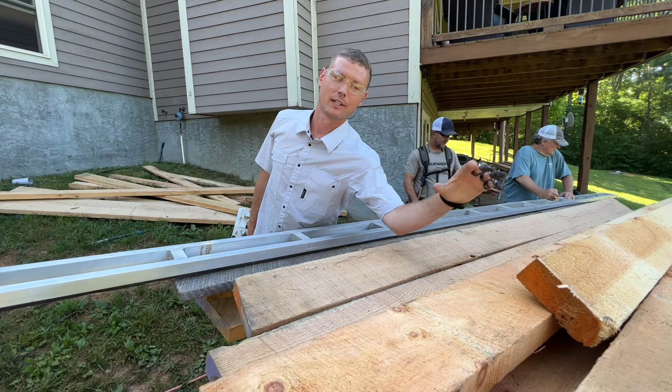What are you guys making? I'll tell you what, you start that end, I'll hold this in. We're making the wall framing now. What's heavy? It's white pine. Oh, it's pine. White pine. Really? I was actually scared to use it, but it doesn't matter. Not inspected. It don't matter. It's actually fine. It's totally fine. White pine studs. 2x4s, not 3.5. Just by like an inch and a half. See. You're still gonna have to cut it. Oh.

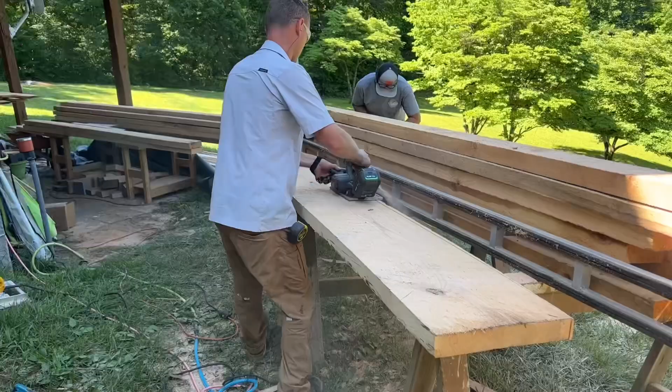So our platform is done, and I'm just wondering, we spent most of the morning just making the studs, right? Yeah. I mean, basically taking these huge boards and making studs. It was free material, but I was just doing some maths to figure out we saved maybe $400, like 40 studs, $10 a stud for a 2x6 stud right now. There was like 4 of us working on this. Does that add up? Probably not. So maybe we'll talk about more of that in the video of, you know, was it actually cheaper to have free material?

Uh-oh, now. I just couldn't help but overhear you talking about I think your maths didn't add up on the free material. Well, you know, to have a successful YouTube video, you have to have a really good looking thumbnail. Okay. All right. You got to have a really good title to your series. Yep. And I was thinking about it, so I thought we could name this one the most inefficient, labor-intensive, slowest way to build a barn. Not for free. You thought it was free. I thought it was free. That's what it's gonna be.

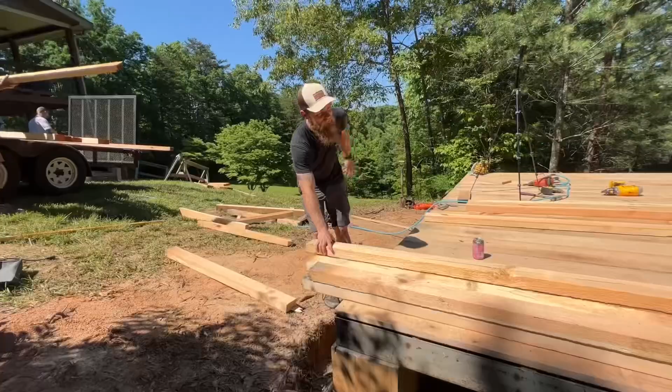Hey, what's something stupid we just did? We put all of our wood where we're gonna build a wall. Right. This is not a big platform, so now we're having to move it all back over there. Yet another snag here with this material we're using that was free is that 3-inch long framing nails will barely go through it into the stud. These are plates. You have like 4-inch nails somewhere? 5-inch? No. So we might have to just tack them and then toenail them. You can toenail on the front, actually. Well, on the edge. On the edge. All right, well, that was just something to note.

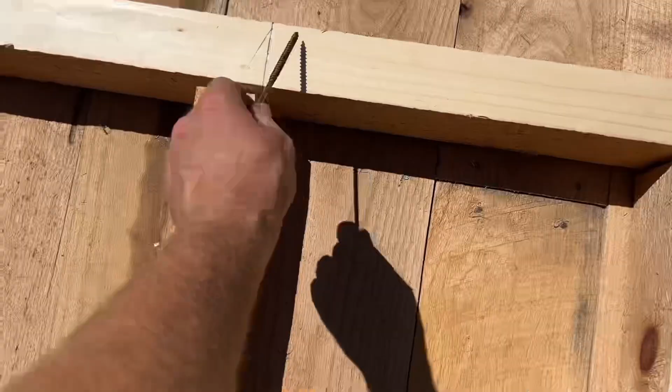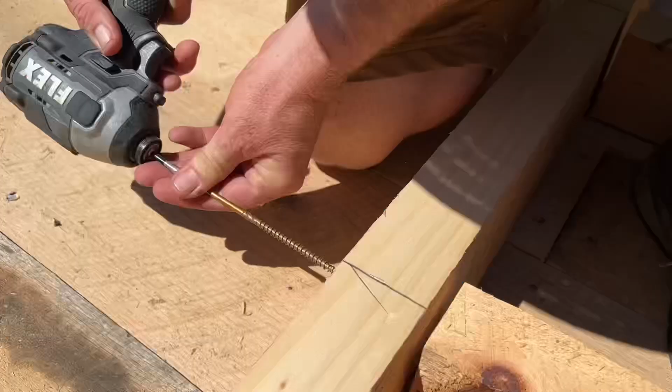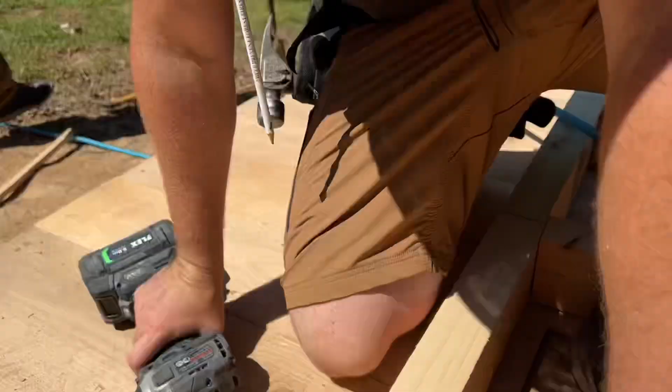And I'm just tick marking the center of 16s here. Because we can eyeball center, and we got a super wide stud. You got 4 super wide studs. Yeah. These are stiff, and they're not bowing down to straighten on the studs with these nails. It's just pulling. So I'm going Big Daddy, like 4-inch screw, one of them at least, to try to straighten it. This might be a 6-inch screw. I don't know. Ow! Come on now. Yup. Oh, it worked. I think that worked just fine. I need about 1,000 of those now.

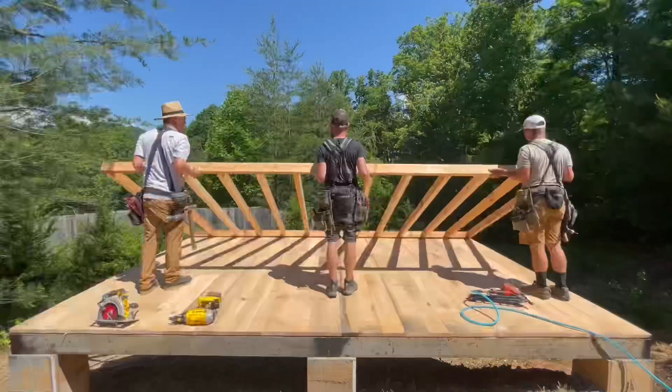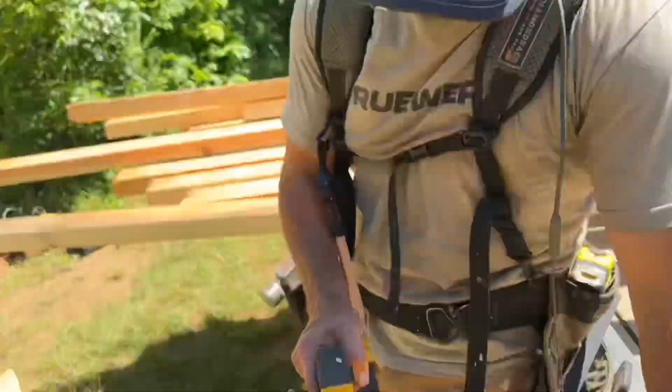Is it just me or did Jamie forget to lay out jacks on the wall? He forgot how to lay out walls. Dude, we don't need jacks on anything like this. You just put studs in. All right. So that's a little over 6 feet there between the, I think that's enough room. Okay. So let's make it 6'2". You pretty good on this thing? I mean, I think so. Okay. 6 feet? Let's pause for a second.

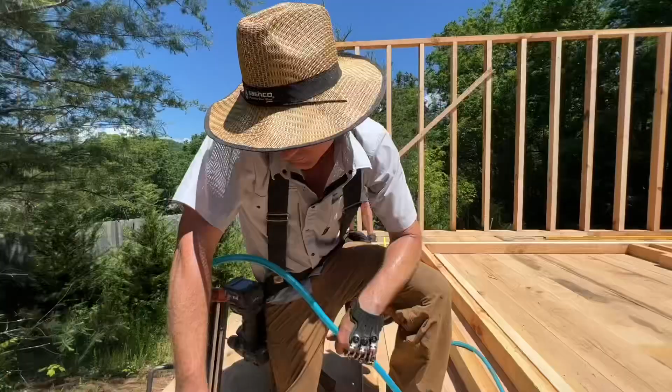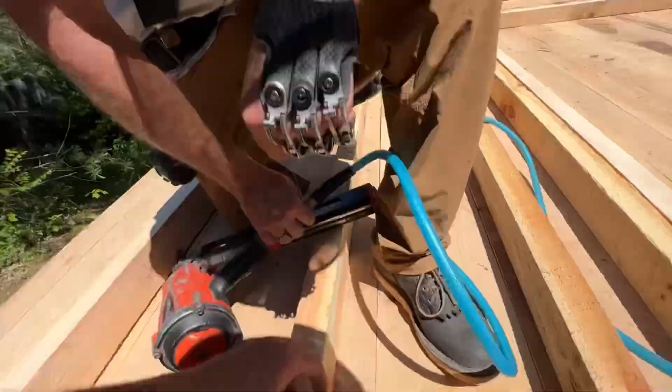I want to count how many nails you're having to use in one of these. Well, normally you would use 3. Okay, so we got 1, 2, 3, 4, 5, 6, 7, 8, 9, 10. 10. So we're losing on that.

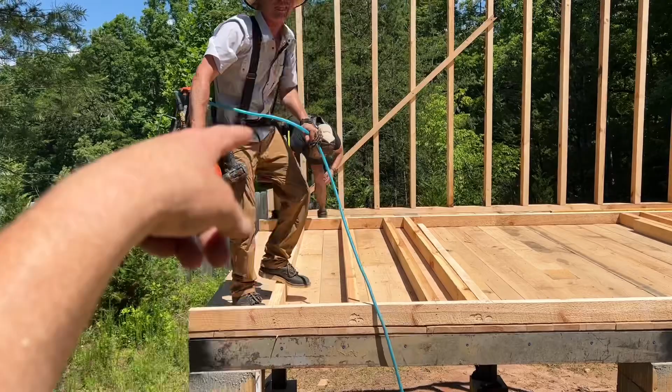I mean, of all the things that we could be struggling with, I didn't think fasteners being too short is what we'd be having. Oh no! We need like some TimberLoks or some 4-inch big old spikes. Is there a nail gun that shoots like a 6-inch nail? No. Well, maybe. Because that would be perfect. Hey, those were all leftover nails though, right? Yeah. We didn't buy any of them. Well, we bought them at some point in time, but not recently. We've been saving them for this.

All right, ready? Yeah, set, go. And Ray's out. Oh, that's nice. Ray tapped out. All right, who's holding it? Somebody? I got it. I got it.

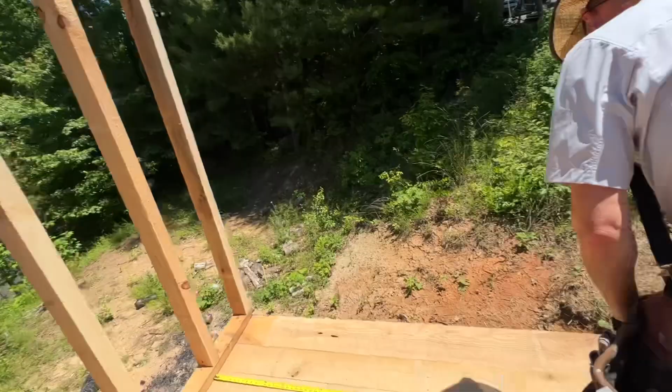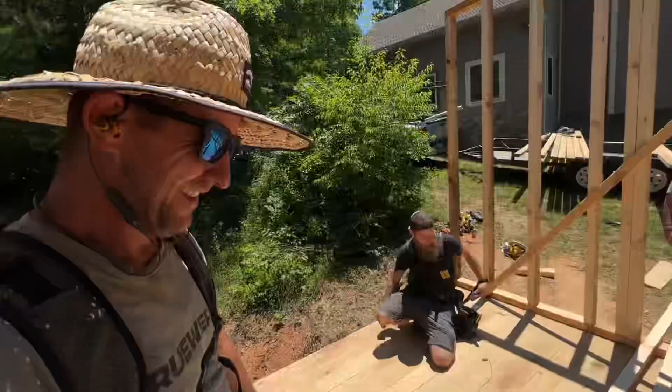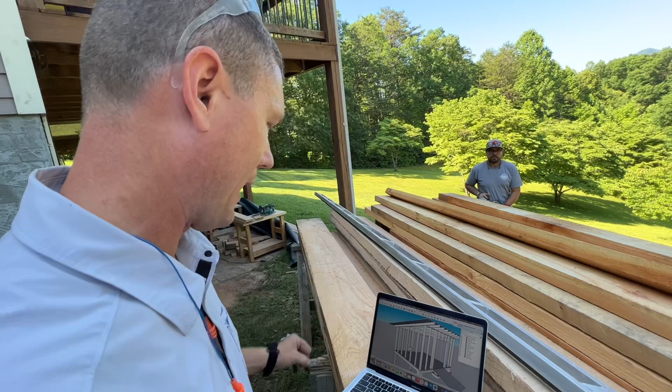All right, so remember how we had a plan that was gonna look kind of like this? Well, you can forget all that. Based on what the pile of material has given me, I'm thinking I'm gonna change the plan. So let me show you what I might have.

Jono, he's like, just be quiet, I'm waiting to saw this board. What? Hold on, Jono. Wait. It'll just be 30 minutes.

Okay, here's the big problem. I don't have rafters long enough. I was gonna glue some up and make some staggered, glued up, nailed up, screwed up, all that. Then I decided against it because I had some more 2x material that'd make good rafters, but they're too short. So what are you gonna do?

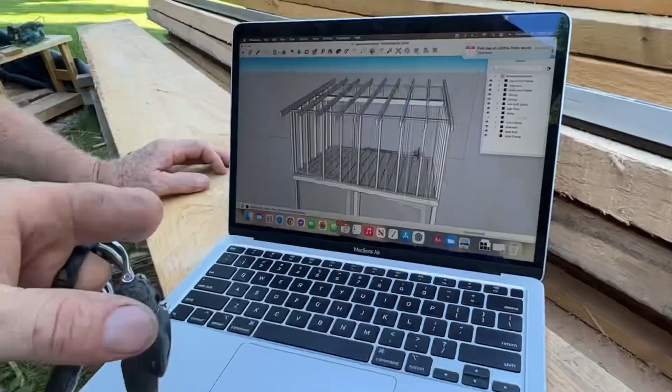Well, we had this idea here. You can see the steel beam. We were actually gonna put a steel beam in the center of the span to break the span, and put a little metal plate there to bolt it through. So what's the plan now? Well, I decided against that for a couple of reasons. We don't need to talk about it.

So I started drawing with pencil and paper here, just a really quick sketch. I drew that while we were driving to dinner, so if you wonder why it's all squiggly, don't worry about that. I wasn't driving. There's two, and I think I've already decided which one to do, but I want you to feel like you get a say in it too.

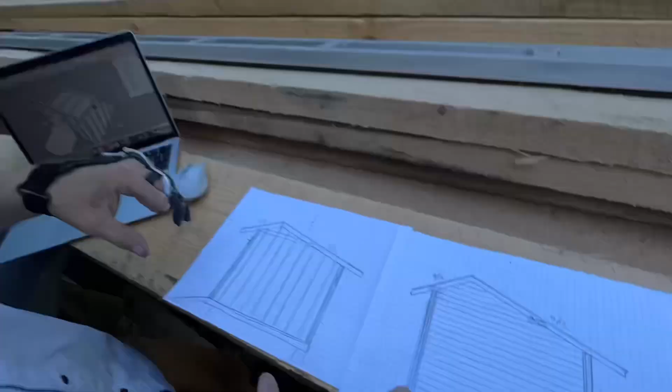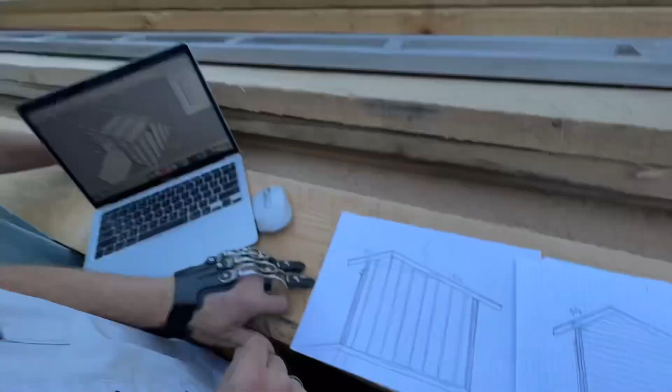So there's two different roof pitches. The maximum rafter length I have is 12 feet. I started at the back and went 12 feet to see how far to the front I could get, and then a steeper, shorter pitch in the front. 8/12, 4/12. So that's a 4 and an 8, and this is a 3 and a 6. My answer is I don't care, it's your mower barn. All right, we're gonna do the 4 and the 8.

I also drew two types of siding: the 6-inch lap siding, and the board and batten vertical. I think we're gonna do that. It looks less busy, see how there's less lines?

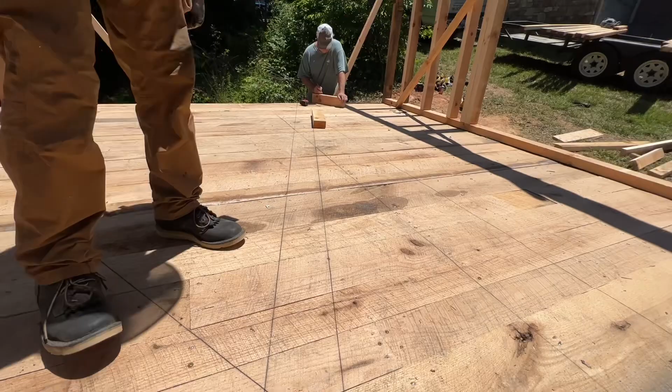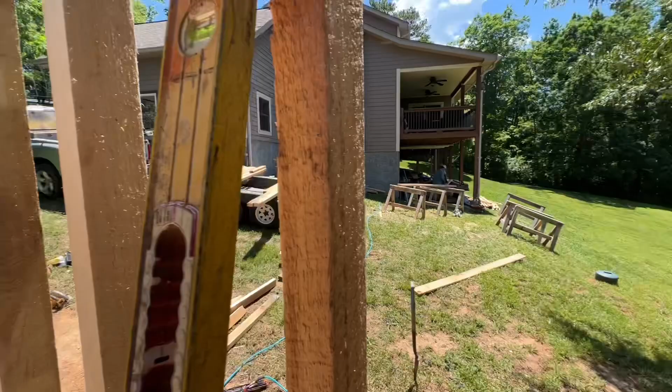What is this? We've reached a hold up because Jamie and Arlo are having a meeting of the minds. They drew out the roof system full scale on the floor to make sure the lengths of the pieces are lengths we actually have. I thought we were doing a straight 2/12? No, he changed it. He didn't have rafters long enough to do it in one shot because we're not buying material. We're just making the material for twice the cost.

So this thing's not going to be a shed roof. It's going to be an asymmetrical peak, going way up and then a little down, with different pitches. Look, they got the ridge with like a 26 degree miter cut there. All this stuff. I'm out of here. And we're just jacking around talking about how to get our hat to fit the best.

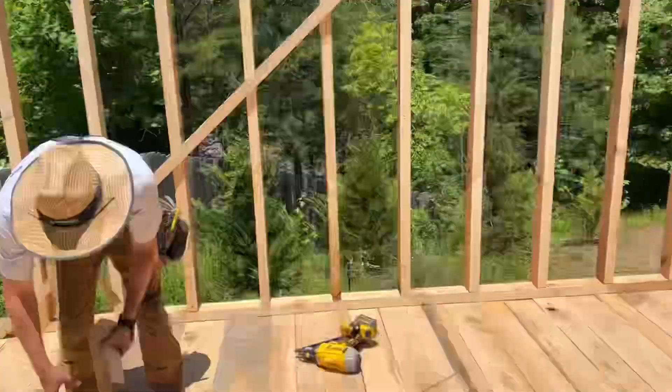Well, you guys were thinking that he couldn't take waiting anymore, so we went over there to see if he could speed you up. My brain just doesn't let me stand around and do nothing. I think that came out of a woodworking catalog. That's a good square. It's a really nice square. I've got a number on it, it's indented, so you're not going to lose them. Hey, did you see it?

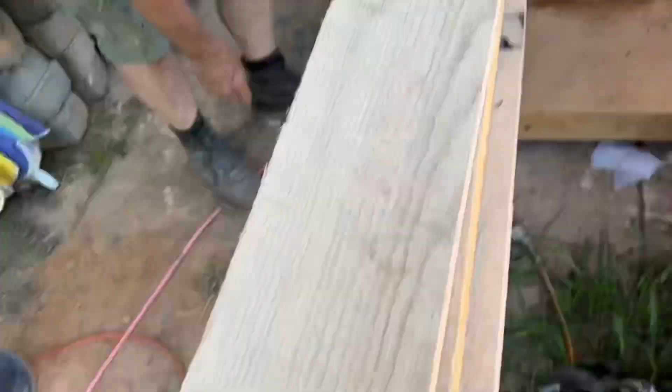Usually I use a speed square to do a bird's mouth. He's gonna show you how to do it on this. Let me come around to the correct side. Normally we would go with 12 inches, and it's a 4/12. So we're running across the edge of the board at 12 here, and it's 4 there. But because I'm lazy, this is 24. So I just pin it there, and I push this to 8, which is double it, right? So you're doubling both numbers. Yep. There it is, and then I just come back and set it here, and I mark 4 inches because that's the width of the plate.

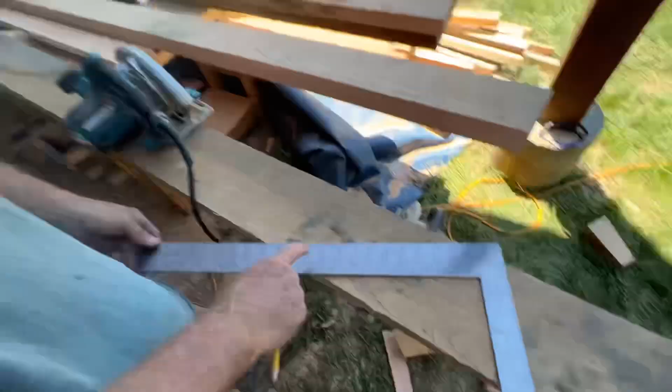And what's critical about this that he hasn't said yet is that if you're doing the outside of the thing here, you do the outside, or you do inside. Yeah, you'll always have it screwed up if you don't. Yeah, I've done that before. I mean, I've never done that. Oh yeah, I've never done it either. That's why I know not to do it.

All right, now let him try. No, I ain't trying. Yeah, let's see you do it. Do that cut. Now, easy. Let the weight of the saw do the work. That was an interesting way to hold it. It was very careful.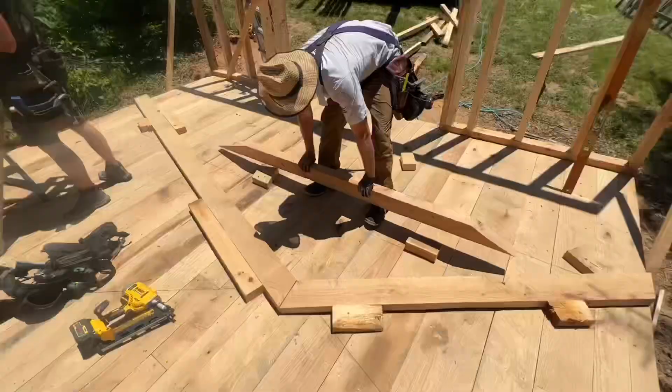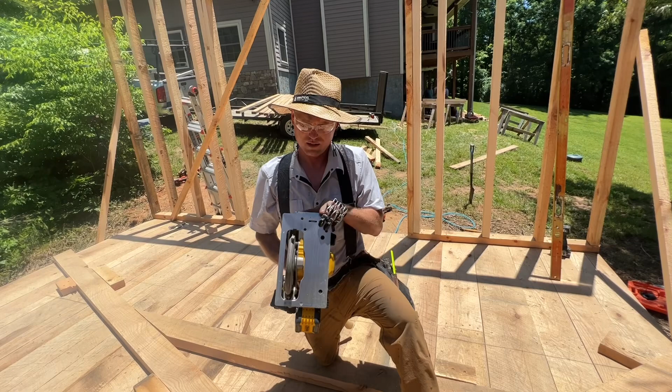Now the question is exactly how I'm going to attach all this together. I don't know. I'm not saying it now. What? Nothing. He said you could have gone and bought 2x12s. Dude, this saw cuts at an angle. Is that what it is? It's way angled. Yeah, we were noticing that on some boards. Bottomed out at 0. It's angled bad. I think I dropped that off a roof. Well, this cut's way angled, and all this crap I cut was with this saw. I'm sorry. It's got some adjustments on it somewhere.

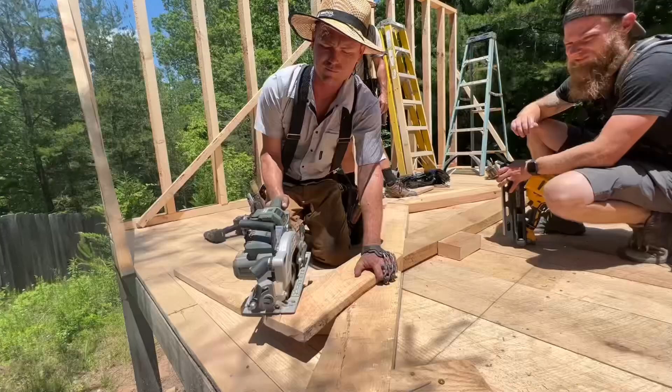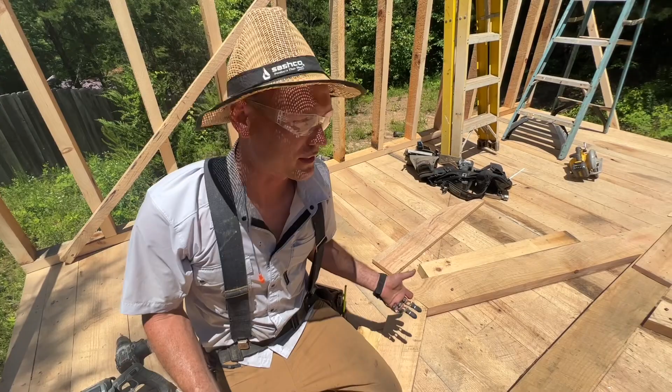A lot of stuff just happened here. We're making this up on the fly. I'm sure you can't tell by watching the video. So we're making a little truss, a baby truss. We're putting little scabs across the connection between the collar tie and the rafter to hold it from spreading. That's the purpose of it. And you've also made a full-scale jig on the floor to make sure they're all the same. We'll put each piece of material into the jig. That way we got repeatability. They all come out the exact same shape and size, and if they don't fit in the jig, they get trimmed until they do.

Right. And now we're gonna start putting these up one at a time. Actually, we should check this one before we make all of them. And also, we can't put these scab boards on the side of the truss that goes on this end. If you imagine this one getting lifted up and put out there, the scab boards will be on the wrong side, outside the building. No good, no bueno. So we're gonna start with this one, check the fit, and then we're gonna make, what, 7 or 8 of these? It's not that many.

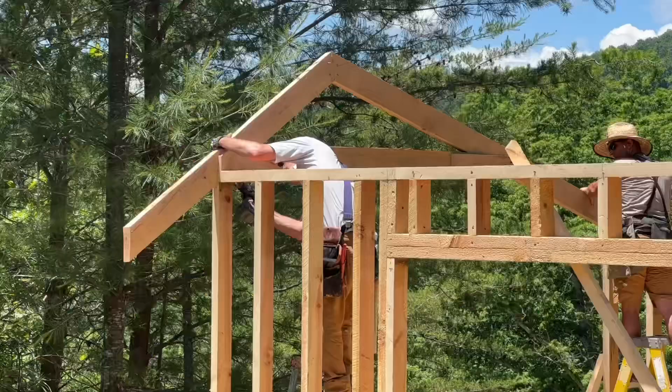It's really heavy, it's oak. That's why we don't do oak trusses, I guess. Here you go. Sucker's heavy.

If you take a look at the peak of the truss, you'll notice there are no scab boards holding it together. There are some toe screws, but the reason there's no scabs is because those two members are in compression. They are being forced together as weight is applied to the roof. So there's no chance they could pull away. They will just push tighter to each other. The scab is really good for pulling away, which is tension. Yes.

So on a serious note, why is the peak not centered, one side so much longer than the other? Well, I actually do have a good reason. Besides the look of it, it's kind of a look. Have you ever seen a garden shed? We built one like that once for Dr. Zimmerman, remember? It's a sheddy kind of look. I like the shed look of it. That's one thing. Also, it's a matter of what lengths of material I have and what numbers.

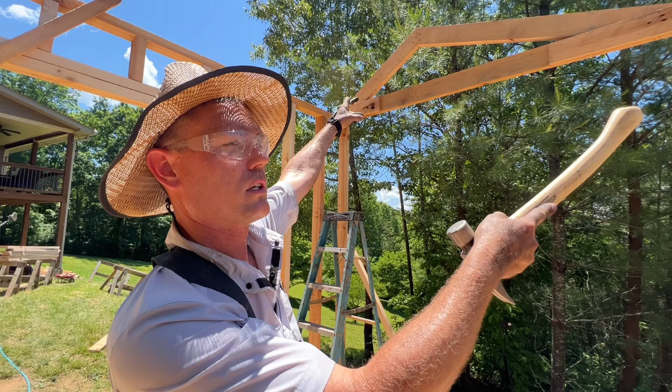So this 12-foot rafter, that's the longest rafter I have, and I only have enough of them to do one piece per truss. Yeah, only one piece per truss. And then the rest of them are shorter ones, like 8 feet or less. And so I can make that. The middle piece is like 8 feet. Those are 8 feet. That's 12. So just the ratio of lengths of material I had available, this type of truss was a fit. That actually makes sense.

Yeah. And it looks real sheddy. Yeah, well, it looks sheddy, all right. Super man. Would you say it's sheddy? Yeah, that's slang for.

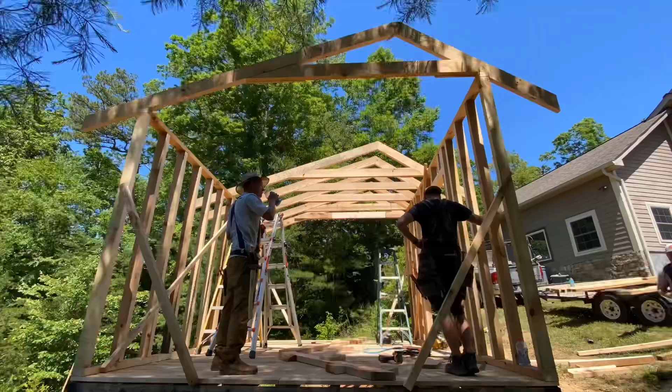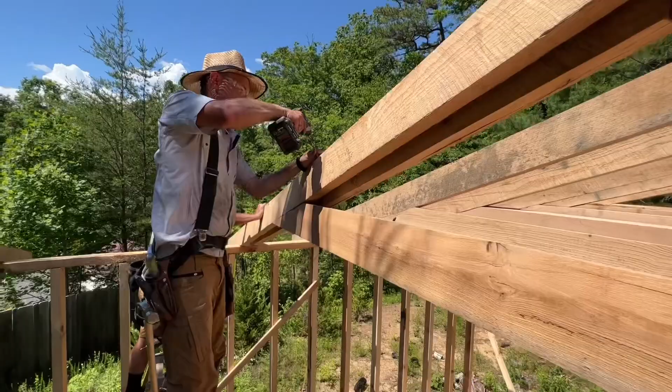We're down to these last 2 trusses, and it seems like it would be a good idea to put one up and then put the other one up. But a good trick that we've learned over the years is that you sort of run out of space. If you try to get one up, then you need room to flip the next one up. There's not room to do it. So a good trick is just to get one in place, slide it over, tack it to an existing truss, and let it chill for a minute while you get the second one up, put it in place, then untack that one, slide it over, make it easier on yourself. Pro tip.

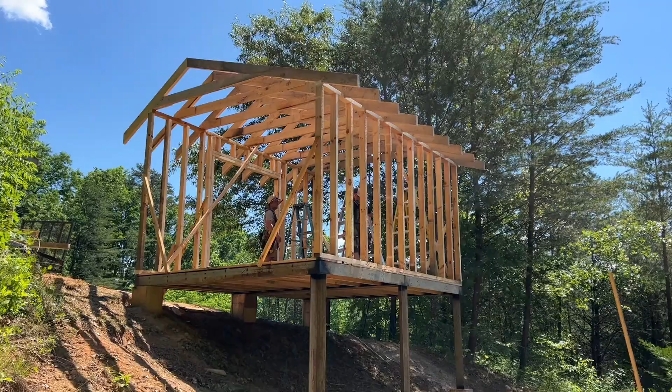Well, we ran out of pine for the studs. And even though I have oak that I could use for the studs, I'm really scared of shooting the siding nailer into the oak, right? With like a 2-inch nail, it's not gonna go in. Bad. So I do have some poplar, and it's really nice, but it's not the same thickness. So I'm just adding a shim here to fill it out to the full thickness. We'll put this to the outside. The siding nails will go through that and straight into the solid piece of wood behind it. I don't think you'll really notice the rip in the finish.

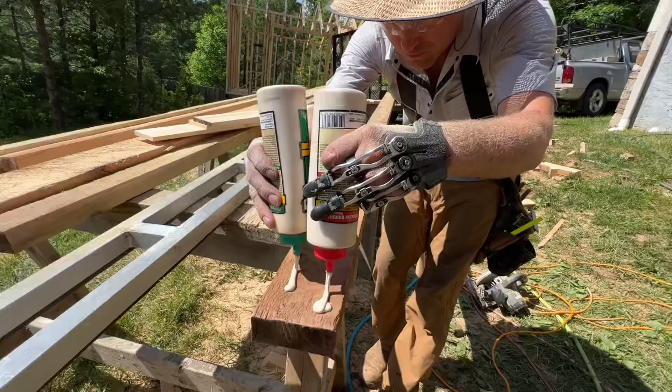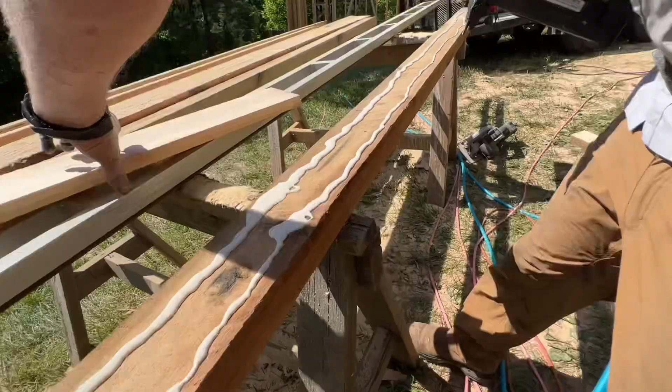Jamie's furring those boards out to the same thickness as these, and the reason it matters is because he decided to do these studs flat instead of this way. The reason we can do that is there's no insulation value needed, it's not a load-bearing wall, and it'll give more nailing surface for our 2 pieces of vertical siding. So that's why it needs to be about the same thickness.

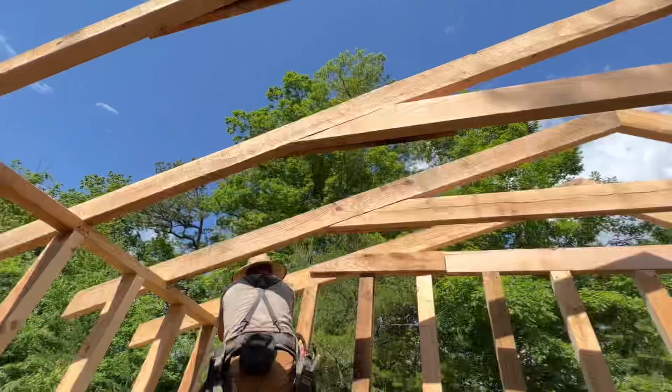So, I think it's the first time I stood inside the building today. Feels nice. Unless you're spinning in circles like I just was. Dude, that was a lot of ripping. Yeah. 16-inch.